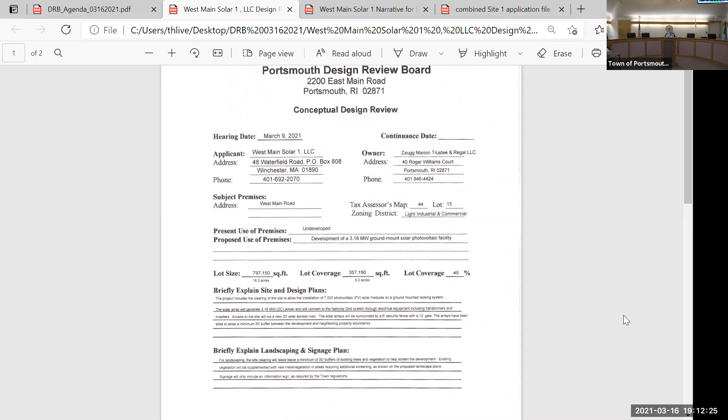I'm just going to give you a quick overview. If we need to pull up plans, we can do that as we go. As you just got introduced to the job we're talking about, you can see the commercial part on the left of what's showing your map is the part along West Main Road, and the back part is light industrial. So that whole site got some undue regulations that say we need to go through a major planning review. This is the first step.

It's about 18.3 acres total site. It's undeveloped at this point, mostly treed. We're talking about going in there and clearing approximately 12 acres of trees, with the solar array taking up about 8.2 acres of the site. New construction road coming in from West Main. The electrical systems will connect to an existing National Grid pole that is right on West Main, just to the left of where we plan the entrance road.

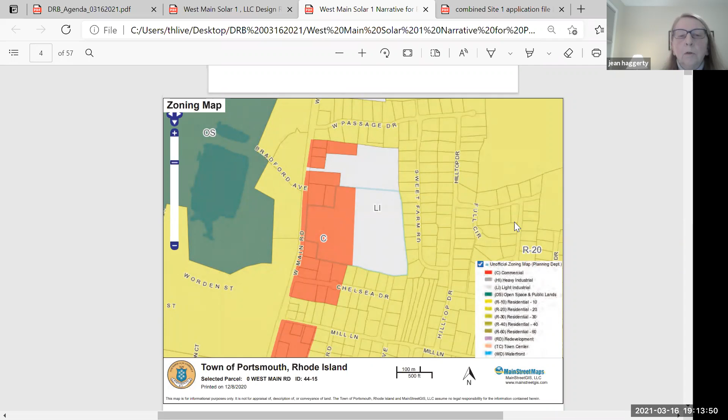Looking at your local regulations, there's a minimum buffer all the way around the site of 50 feet. We tried to extend it where we could, and there's just one spot that gets pretty close to the 50-foot line. We're trying to keep as many trees along the outside as possible. There's an attachment D, the landscape plan, which tries to address any place where the screening may not be found adequate. I'll give them a second to get to D, it's way down there. That new screening would be added. They're talking about doing a couple of different phases that have some evergreens, in some parts understory such as dogwoods and redbuds, and then some shrubs, mostly to screen the site from the road and from the abutters.

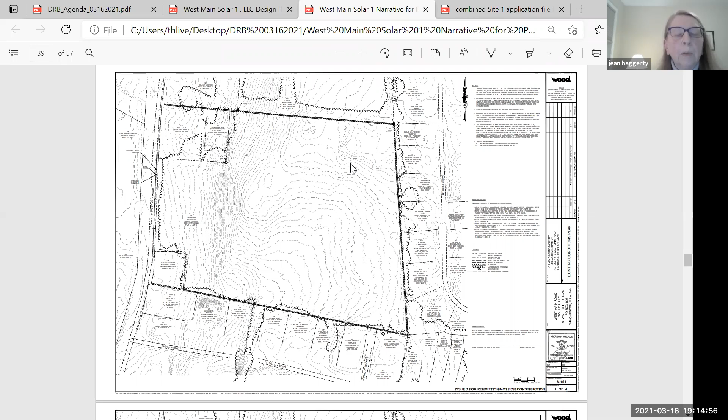The property slopes pretty much from northeast towards the southwest. So you can see, if you can see the contours there, the high spot's kind of northeast, and it flows down towards the road and towards that southwest corner. We are in the process now of doing stormwater calculations, which you don't have yet, but there will be a need after clearing trees and putting the arrays in place to put in some stormwater controls. We would say they'd mostly be on that west side of the site in order to get off the slope and to provide the most protection we can from stormwater.

The arrays total about 7,500 modules. It's pretty good size, over 3.1 megawatts of DC power. The site you're looking at there, you can see pretty much the top right-hand corner is the closest that the fence gets to the property line. Everywhere else we're more closer to 80 to 100 feet away from the boundaries.

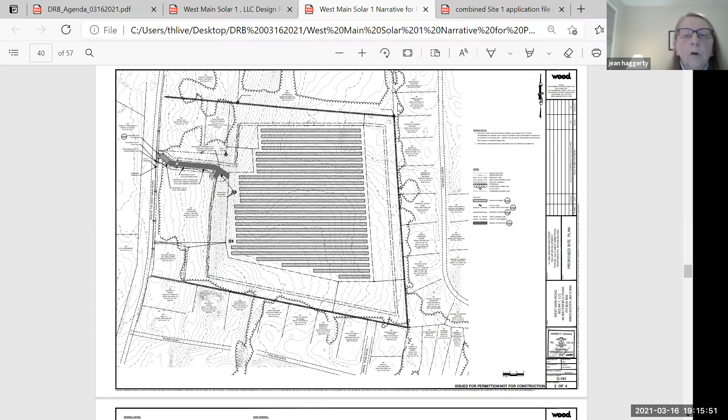The design is solar panels that are on ballast and driven directly into the ground, with typical piling about 6 feet deep. The panels themselves have inverters on the top that go to transformers, and there's a transformer that's also inside the fence line. The fence will be chain link, security fence all the way around, and reach to a 12-foot access gate for security. We'll make sure that we are following all the fire department regulations and making sure everything's wide enough for allowed turns and other things there.

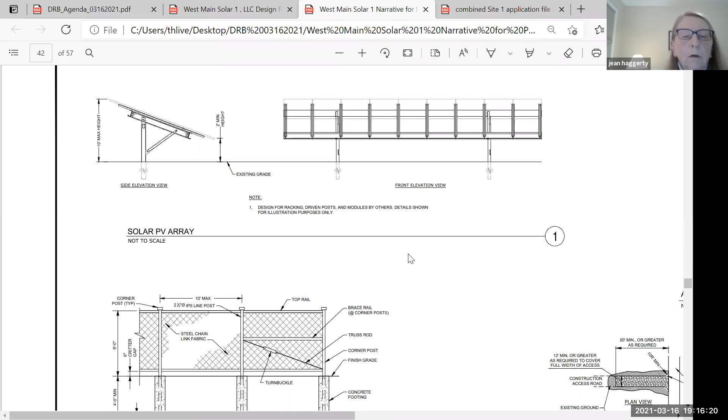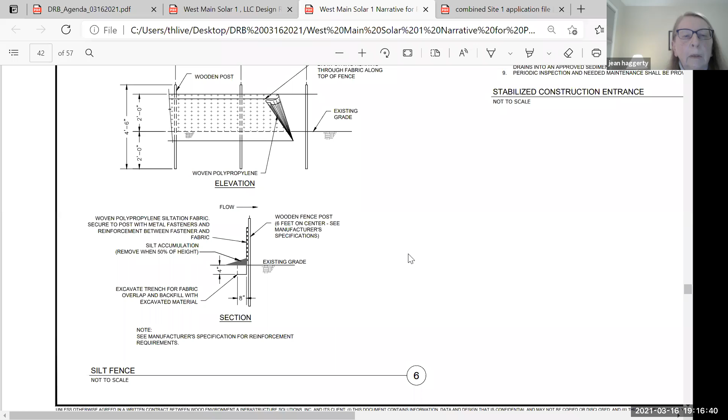Take a look at the top left corner, which shows you typically what the solar panels themselves look like, and the tilt of the panels, typically 8 to 9 feet tall. It can be up to a total of 12 feet, depending on the tilt. You can see the view of the piles going into the ground, chain link fence there on the lower left, and erosion sediment controls, which of course would be placed early in the project so that we won't have any erosion leaving the site. We're not planning on doing any massive grading or anything. We're trying to clear the trees and probably go in and do some minimum amount of grading to make sure we can put the panels in easily.

Trying to disturb the area as little as possible. I don't know what kind of questions you have, so instead of going into too much detail, why don't you ask me questions and we'll try to get everything answered for you. Let me just start real quick.

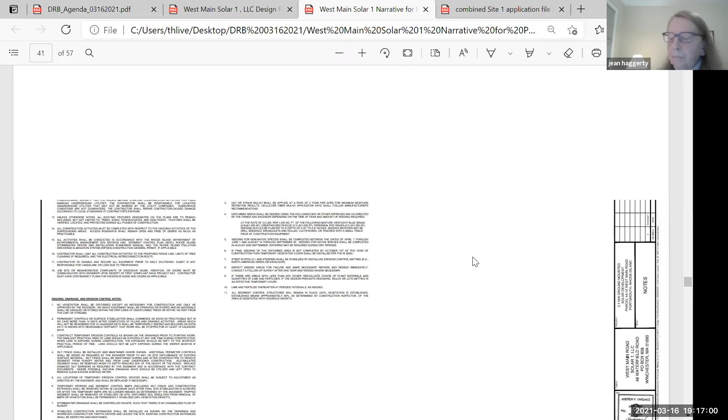Our purview of the design review board is to look at the site plan and the plot plan, to look at the dimensions. Obviously, this isn't a street, there's no septic, and there are no building elevations. So it really comes down to the landscaping plan and signage.

I understand you do have to have a sign of some sort. There'll be a sign near the entrance in order to meet your requirements, but it will have no marketing or anything like that on it. It'll be built to the required size, and it'll basically just have emergency contact information on it.

Any signage required at the site would be the utility or town requirements. We wouldn't have any signs for the project except any requirements from the town or utility. Typically they're plaques from National Grid on equipment and poles, and the town requirement would typically be the fire department if they wanted any plaques on any poles.

So you'd probably have a Knox box at the gate too, if it's like a key. Yep, some towns require a Knox box, some just require labeling. At the entrance of the site, when we come in, there'll be a couple of utility poles, and then there'll be a customer-owned load break pole.

Typically that's for the fire department and National Grid, and once that's shut down, the whole entire site is shut down. That's typically what they will shut down. There's nothing really combustible within the site.

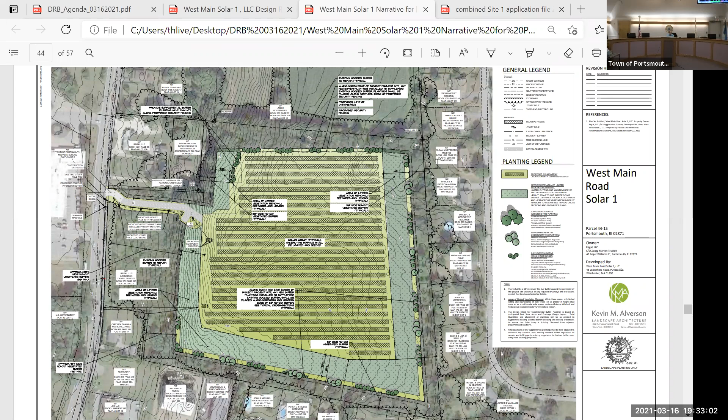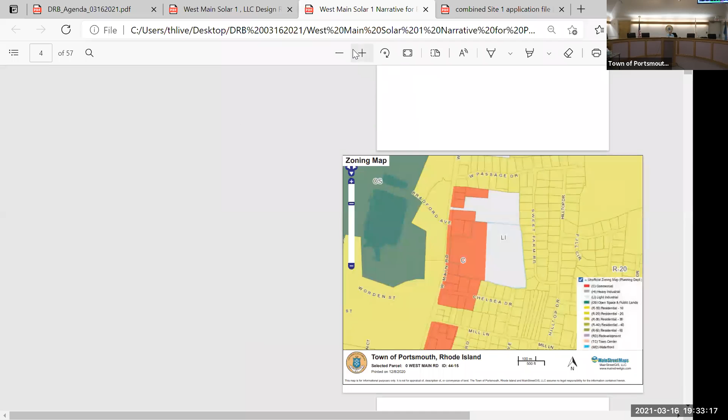So that affects Sweet Farm Road in the back there, right? That's residential, and then part of the area up to the cul-de-sac on Russo Road, that's zoned industrial. And then those plots behind there are residential as well. Mike, right? Yeah, he's pulling up the zoning map.

To the east and to the south are where the residentially zoned parcels are. So that puts them at 30 feet clear plus 30 feet of buffer, so that's 60, then, Mike. Well, no, the setback has to be 50 feet, and the buffer has to be 30 feet of that 50. Oh, yeah, right, okay. That's 50.

Any more questions from the board members? Is there any interested parties or abutters that would like to speak at this point? There's no other attendee on the call, Mike's checking that.

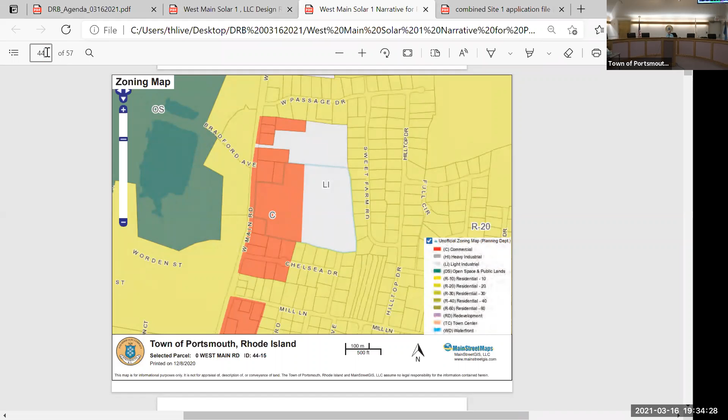So, the planning board, you're going to the planning board the 14th of April. The following Monday is the 19th. You could possibly come back before the board if I can get a quorum with everybody.

Do we want to come back after master before preliminary, once we have the DEM information all in hand? Because I think that would be the next step, would be all the stormwater concerns and issues, and the landscape plan would obviously be updated with any concerns.

I don't know if we'll have anything different the day after planning board than we do now. They're going to need time if they have to revise anything.

Okay, so just looking at the calendar, we're trying to keep our meetings on Mondays for different reasons. The 26th of April would be a town council meeting, and there's not another Zoom account available — we've run it off the same account.

So May 3rd would probably be the best. May 3rd. Okay, we could shoot for May 3rd.

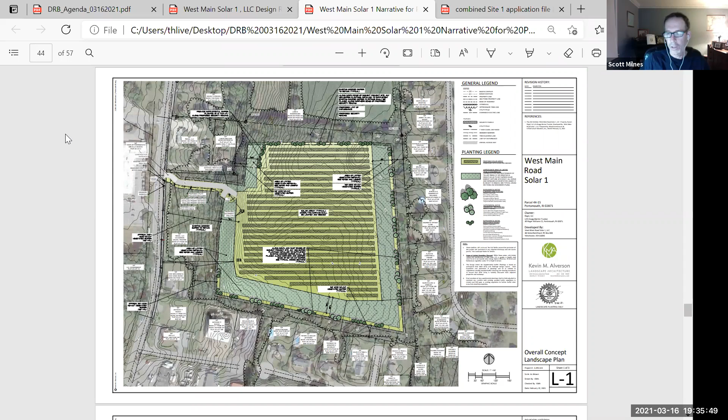So, Leslie, in the report or the minutes of tonight's meeting with the first petition, if you would like to make your recommendations, maybe with Nick, over the landscaping and how you want to describe that — that's really the only thing I see. The signs are the signs, so we're not going to change that, and that's pretty much it on the first petition then. Okay, all right, Leslie, you got all that? Yep, thank you.

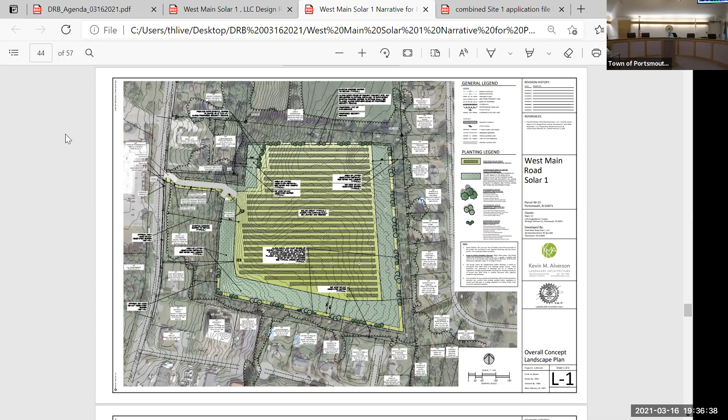So the second petition, since we'll move on, is obviously the same company, West Main Solar. It's for map 30, lot 8. It's zoned R20, and it's the same premise for ground-mounted solar panels. We've already got a roll call and quorum, so I'll let the engineer speak to that, please.

Right, so I could just say quickly, obviously this project will take a different path because it will go to the zoning board first, I think, correct? I think, yeah, we need that — it would be a special use. We need a special use permit for this one.

And this site here — Jean can get into it — there's not as many residences around it, but there are residences there. We walked the site with the landscape architect, and there's a lot of plantings on site that we thought could be repurposed and retransplanted on the buffers to create good buffers on the southwest corner of the site.

So when we get into the landscape thing, we can talk about that. But Jean, if you want to go, you can go.

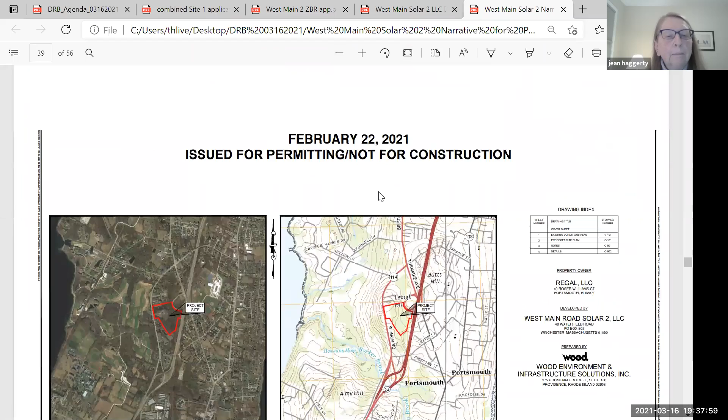Not that much different from a design standpoint. It's a vacant lot, but there is some spoils sitting on the site that need to be cleared out - mostly some rock and construction materials. The middle of the site is actually pretty open, so we don't have as much tree clearing here. The site altogether is a little bit larger at about 24 acres.

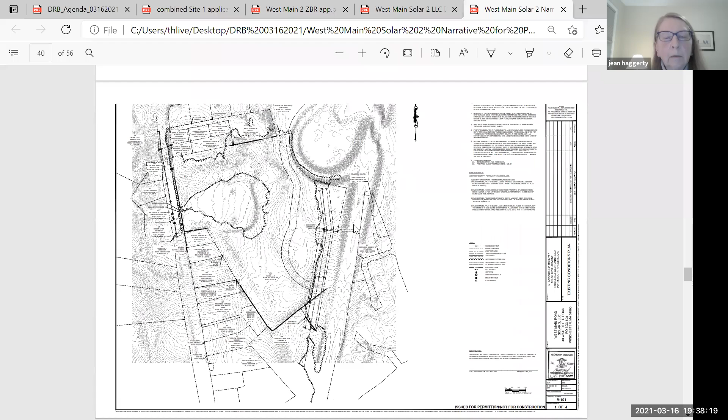In this site, there are wetlands along the right-hand side, closest to where the highway turnaround is. You can see the wetlands line - we are adjusting that line a little bit. We've got an update on that we're working on, but basically the same general area. We're going to need a RIDEM wetlands permit for working here, and we need to stay off the edge of the wetlands by at least 50 feet, so we'll make sure we do that.

Off of West Main Road, there's a new access road coming in to access the site, similar to the other one, 20-foot wide with a 12-foot gate. This property is residential zoned, so in your regulations this needs a special use permit, so the process is slightly different to go through.

We know that based on the preliminary review at the planning board in January, there were certainly some concerns about both screening and stormwater at the site. So the screening in the landscape plan, as Scott said, we were able to walk the site and have the landscaper really look at this because there's not as much tree clearing in the site.

Stormwater is not much of a problem because it actually drains from the northwest side to the east towards the wetland. We will need some stormwater controls on that side, but they're not headed towards anybody's homes or backyards. We'll make sure the drainage is taken care of so it's away from the homes and more towards the existing wetland.

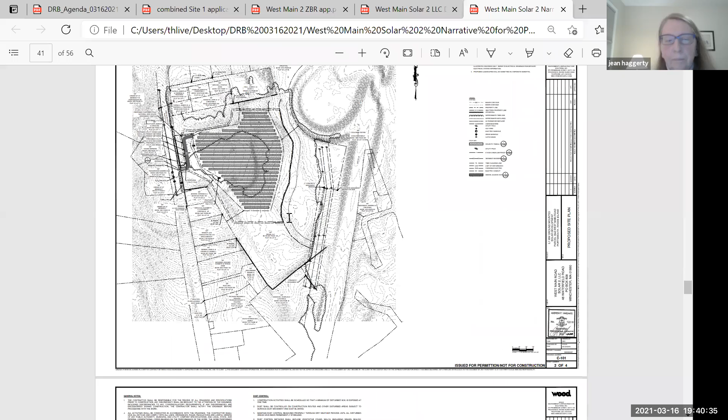So, questions? Board members, I don't have anything right now.

If it's going to be the same fencing, same requirements, the stormwater drains naturally with the grade, the topography now towards the wetlands, same gate, same sign - I can't see anything different.

That's one of those sites that is walkable. I don't know if anyone desires, we could try to find out. I know Alan Shears owns it, but if anyone feels the need to walk it, we could probably get an okay to do that.

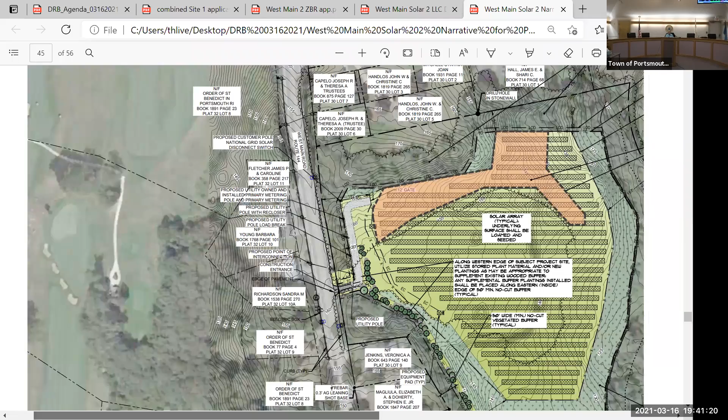Board members, I've been over there a long time ago, so I know what it's like. I went over today and there was like a wire, like a gate. That gate is kind of sitting there with some stones holding the post up because it broke off, so I wasn't gonna go in there and back out.

If anyone on this board or the planning board or any board wants to walk the site, Mike can reach out to Gene, and I can meet him there, or Steve can meet him there because we're both on the island. So we'll be happy to take anyone on site walks.

Like I said, all these plantings that are here are going to come out of the north end of the site, which the landscape architect looked at.

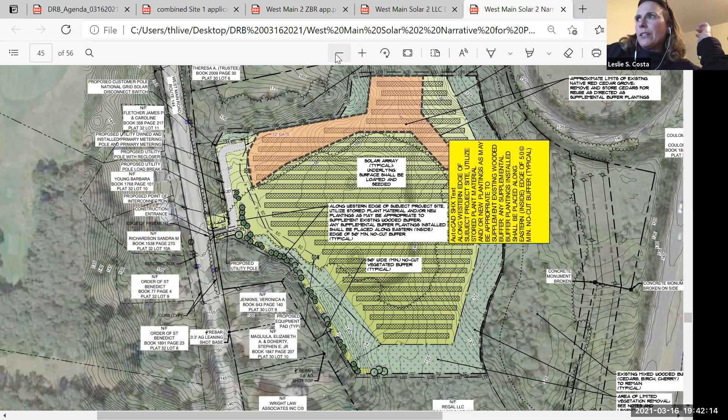I'm just wondering, not that it really matters from the highway, but from this plan, it seems like you're sitting up higher. Are you higher than the highway, or is it sloping?

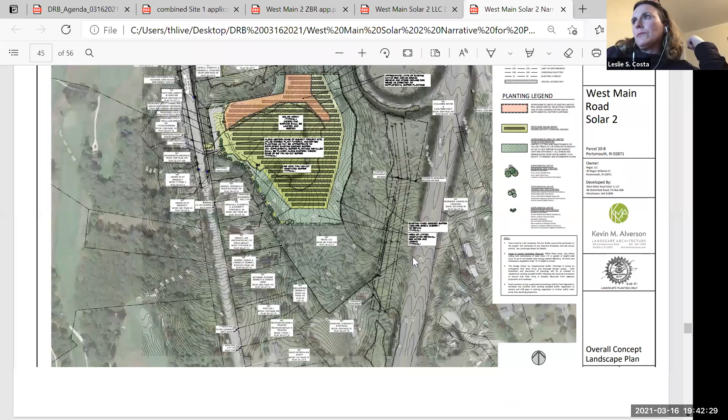Gene can give the exact grades, but there's a big pile of fill in the middle that we have to flatten out, which makes it seem high when you look in there. When you walk in there, it's almost going to be flat when we're done, going down to the slope of the wetland. Okay.

We jogged the path coming in, the interconnection path and the access road. Instead of having a straight shot in, we jogged the poles and went north and right, so when you look into this site, you'll have screening of the array from the road.

That's why we did those plantings in front - straight in, you'll see some plantings right there. And the access road to get in is heading north, and then it does a jog into the array.

So you don't feel there's a need to buffer, just add some evergreens on the east side where you're coming in from the highway? It's not like you're going to be staring at the solar. I don't think you'll see much visual unless you stopped and looked in. I don't think you'll see it because you can hardly see the entrance when you drive by.

You have to look for the entrance when you drive by now. You'd have to pull in and stop probably to see it, but I think driving on that road, it's a pretty fast road there. I don't think there's much visual.

No, I'm talking about Route 24, that loop that goes right behind it. Oh, over there - that's pretty heavy over there. I'm not sure what could be seen on that side. I can't remember. There's all the marshes down there, right off the highway, and then scrub trees and everything.

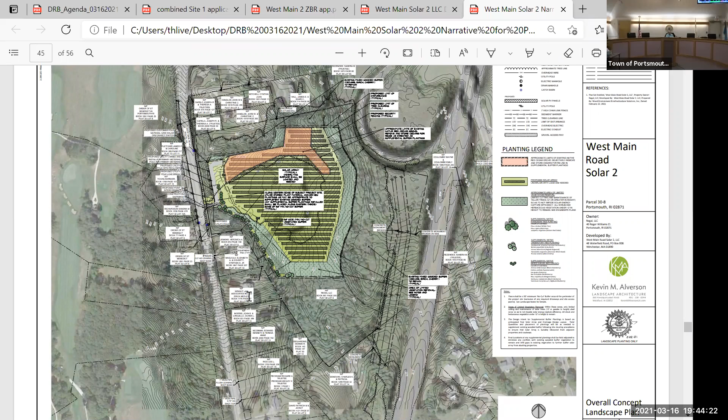So like down when you're coming up the hill to St. Phil's, like Headley - is that it? Turnpike Avenue, the one before that? Oh, Turnpike Avenue, yeah. When you're coming down 24, like from Fall River off the bridge, the first exit is for Boyd's Lane or whatever - the Island Park one.

And then the next one is the Boyd's Lane loop. This little loop right there is the one you come off under Turnpike Avenue and it points you toward Clements Market. Yeah, it's right after the wind turbine. I'll have to pay attention and not go off the road.

Yeah, it's all the back scrub that they have on their plans that is hiding it. So if there's no landscape suggestions for this plot, you don't really need to see anything else, unless you guys really want to walk it and look at it. I can't see the need for any recommendations on the landscape part of it.

Nick, Leslie, Brendan, how do you guys feel?